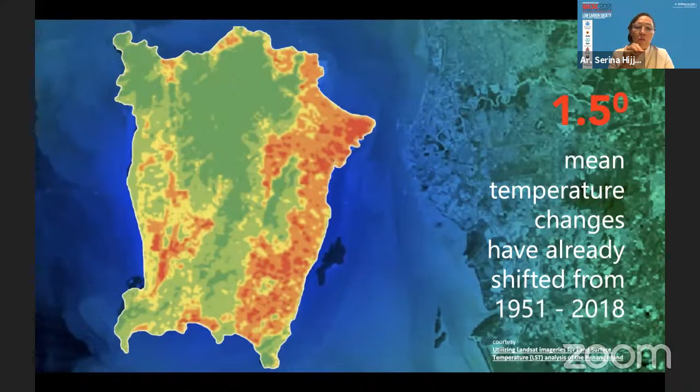From satellite images that we see here, for example in Penang, it's already reading these changes, and especially more acute probably in more urban densities than anywhere else. So densification really relates to temperature rise also, because we are increasing the amount of heat island around buildings.

We can actually map out the temperature difference of towers and buildings without greenery, without softening of green space, by at least 5 degrees. That's an incredible amount. In low-rise developments where there's a bit more greenery around, we might reach 24 degrees. But as we reach higher and taller, with harder surfaces and building materials that we are using, the temperature rise is significant. And that's just in terms of the micro temperature.

Densities are seen to be causing a growing reduction of urban greenery and ecology. Think City did a whole study rising from Kuala Lumpur to JB to Penang, and mapped the differences that have occurred in the last 15 years. And there's a direct correlation that as we get more dense, we also get warmer.

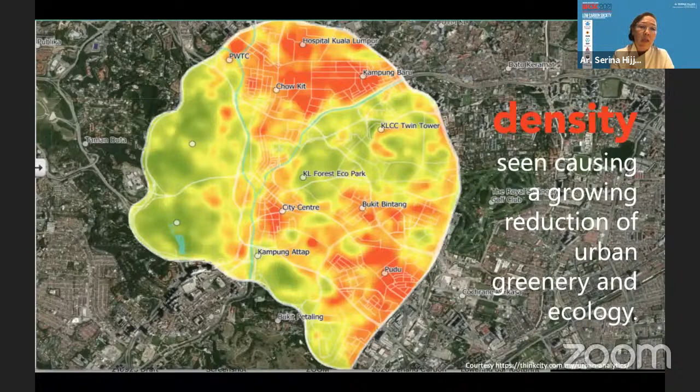So the impact of urban greenery really softens this heat island effect. It's no surprise, whilst Malaysia has an ecological footprint that is smaller than Singapore by half, Kuala Lumpur itself has only about 9.5% of green spaces in totality in the city. Which is low. When you go to Melbourne, or you go to London, and they are basically above 17%, about 20%, you immediately feel you're going into a garden city.

And maybe that's why we had the aspiration in Putrajaya that it would become a garden city for us. So how do we reverse this? How do we change this? I believe we have to really consider what I say is how we make.

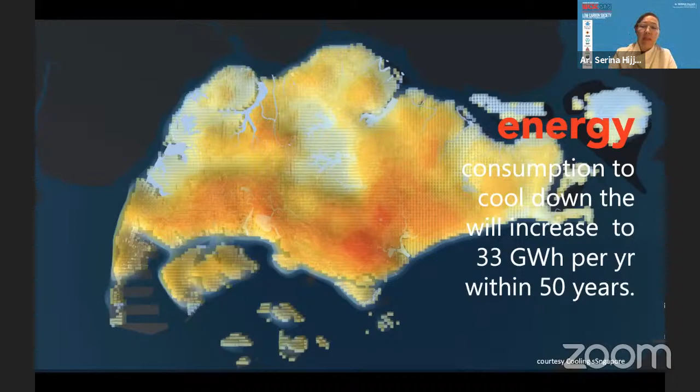So we're coming from the urban environment down to the buildings itself. And we are consuming more and more, and therefore we are also providing more emissions out. The consumption of materials, our emissions from embodied energy to operational energy, water and waste starts to increase. And for now, we start to talk about carbon, embodied energy, and operational energy.

When we started doing the pavilion for Malaysia at Expo, it was the first time that we discussed the idea of embodied energy and operational energy. And this is an interesting thing, and it's a little bit abstract for the person on the street, because how do they fathom what embodied energy is? We all know what operational energy is, and that's from our electricity bill, our water bill, the amount of waste that we send out. We can measure that, but we don't realize what embodied energy is.

So we need to rethink and change how we make. I think no one has really looked at or re-looked at the technology that we're applying right now. We've been on this trajectory of increasing and increasing, because it's based on a technology of efficiency which was developed in the war. So it's nothing short of what we are now considering to be a more nature-based technology design, because the technology we are implementing now was designed in war, and now we have to design for peace.

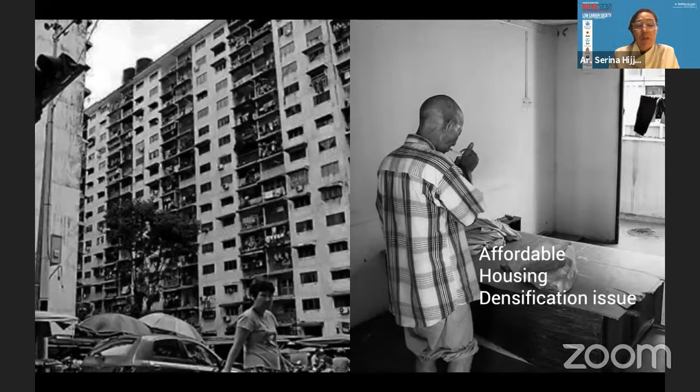Our urban housing typologies, as you can see around the middle ring roads of Kuala Lumpur, involve building these massive car parks below, some reaching 6 or 8 stories, with towers rising above that. There are also other typologies where, if we've got a bit more land, we separate and put the cars next to us. So our lack of public transportation and increased number of parking has really put a different slant on our housing - it's put cars before housing.

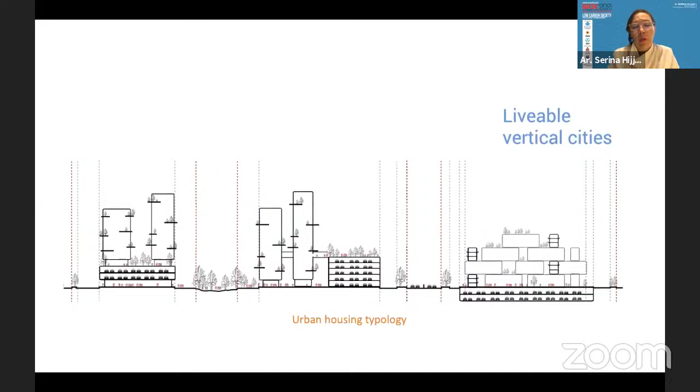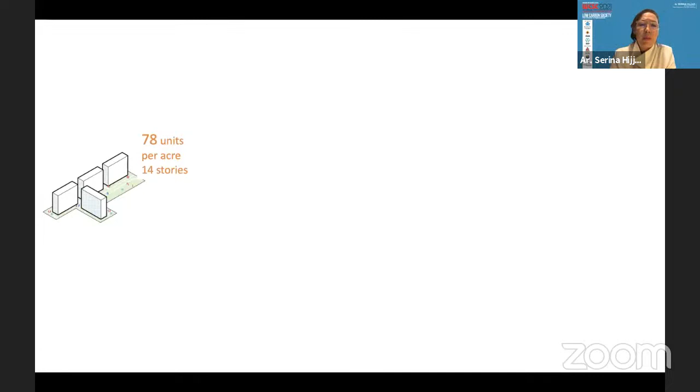So we did a study in Penang, and we saw that we started first at 78 units per acre, 14 stories high - still kind of livable, still almost close to the ground. Maybe at the time we thought those were really high rise, but that isn't really high rise now.

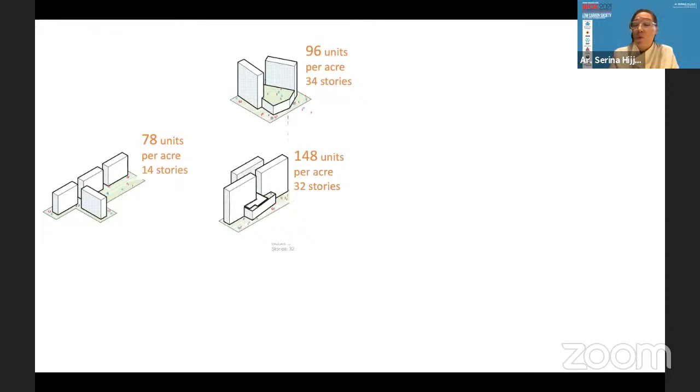We slowly increased that to 96 units per acre, 34 stories, then 148 units per acre becoming more dense at 32 stories. Then shifting up to 173 units at 43 stories, and even higher to 48 stories at 190 units per acre. And finally now, in Penang itself, we've arrived at 223 units per acre and 49 stories.

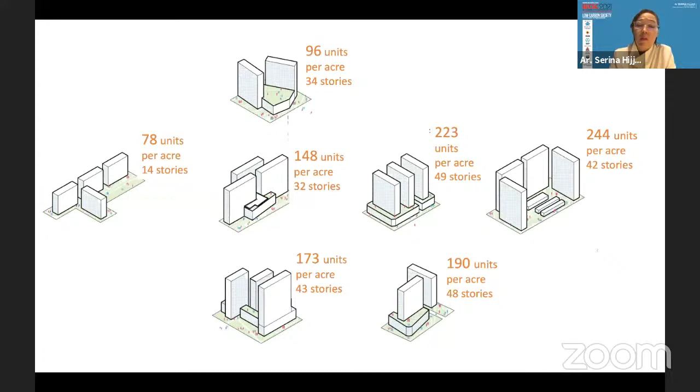This is incredibly high for the type of housing and affordable housing for people. Over 29 public schemes, 340 private developments, a total of more than 73,000 units, occupation for affordable housing for almost 400,000 people. I don't think that this is really a livable solution.

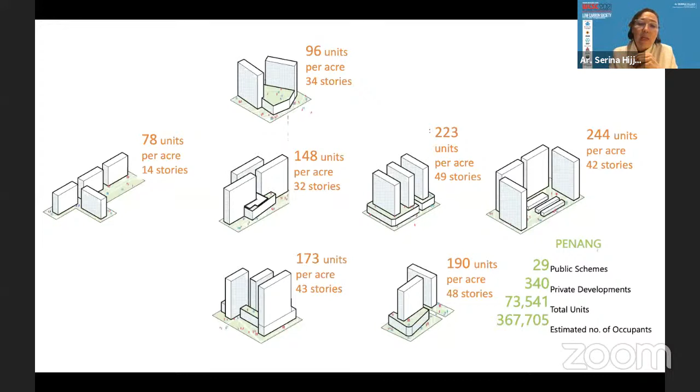So whilst we've seen also adoption of green buildings in some of these schemes, we haven't really seen what I would call real greening in terms of the development.

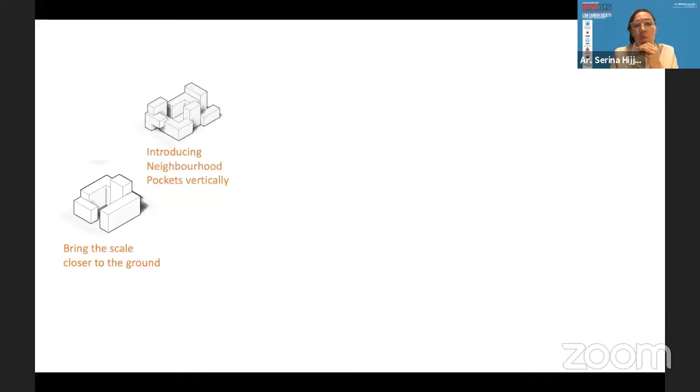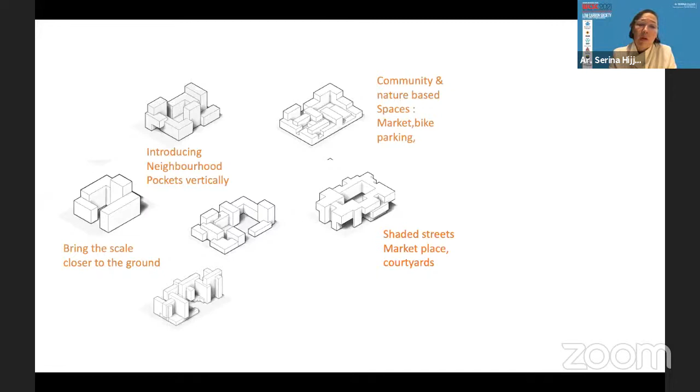So when we did a study, we thought it's really important that affordable housing is closer to the ground, that we introduce neighborhood pockets vertically, and that we look at community and nature-based spaces like markets integrated with bike parking, not car parking. For affordable housing, we should be encouraging public transportation, perhaps looking at biking, even electric parking for bikes instead of just bicycles. We should be considering these integrated with the type of housing — shaded streets, marketplaces, and creating a tropical responsive roof.

In this scheme, we were able to demonstrate that we could arrive at what we call a comfortable density at a comfortable height, providing housing with a greener plot ratio that allowed for future proofing in terms of where we're moving towards, and really look at how we're making our housing.

Integrating urban farming, which is important I think for affordable housing. Integrating some renewable energy, though we may never be able to provide fully. Rainwater harvesting, social neighborhoods and pockets.

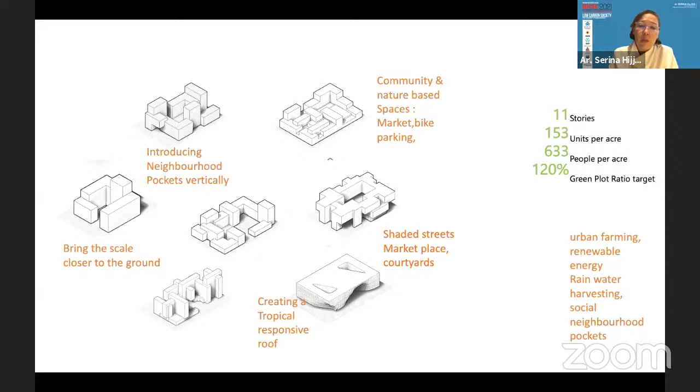Somebody once said that in high-rise residential affordable housing, the people can't afford air conditioning. I think there was a study that actually showed that the amount of air conditioning units stuck outside the building, and the amount of antennas for Astro, really showed that they did prioritize certain things over in terms of cooling their space.

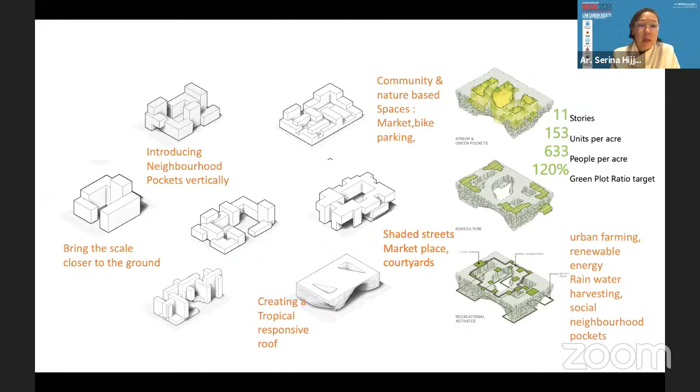So this showed an idea that we could actually move a little bit beyond just densification and integrate things that become more community and nature-based.

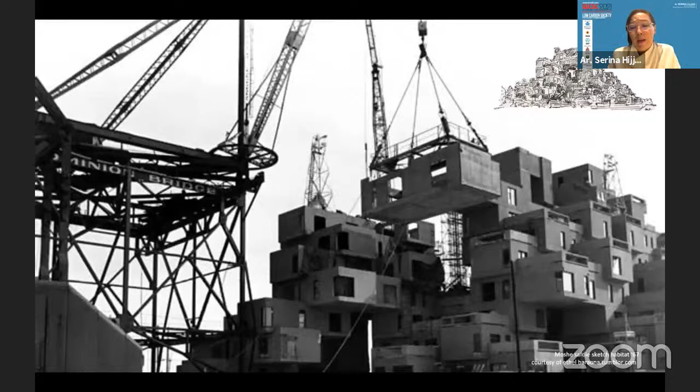So this scheme was probably motivated or inspired by Moshe Safdie's Habitat 67, a piece of seminal work that most architects know of. They like this idea of pixelation of buildings, different sizes of pockets, different places. It was one of the first to do IBS, but it was a failure when it completed. Now it's no longer a failure — it's actually seen as one of the best locations to live.

But one thing is that we have to adapt to a tropical environment. If we were to build a pyramid structure, we would get a lot more heat gain to all the units and the inhabitants living in there. So we decided, how could we make it tropical, responsive to our climate, people, and natural environment?

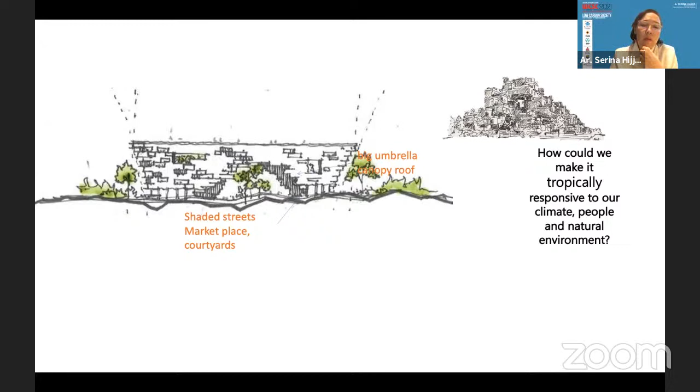We could turn it upside down and create a much bigger umbrella canopy roof, which allowed us to provide urban farming on top, solar panels on top for renewable energy, shaded streets underneath, and replace marketplaces with internal courtyards and places that would become more friendly. As you can see, the building is actually slanted 15 degrees in order for us not to get direct heat gain, but to respond in a passive manner to how housing could actually be.

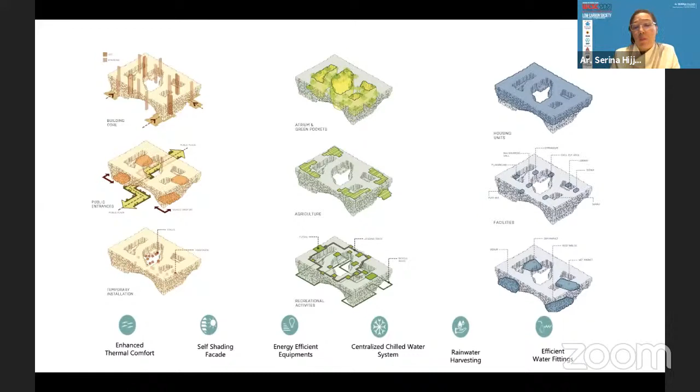This building considers at many different levels: enhanced thermal comfort, self-shading, energy efficiency, centralized chilled water systems, rainwater harvesting, efficient water fittings, and really turns our heads around in terms of how we make and build. There's no way we're going to change climate change, but we can change the way we make and live in our buildings. So this was the example of the building.

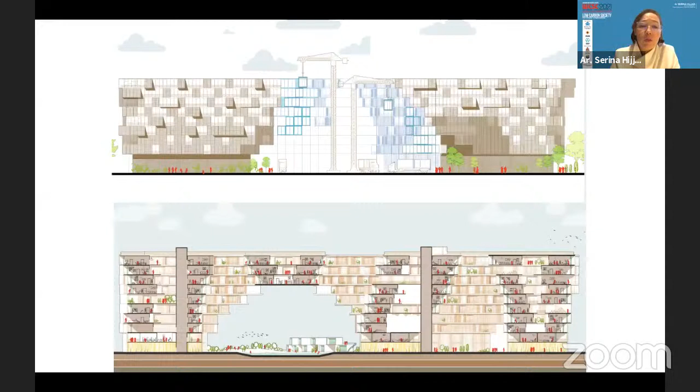It really just rises up to 11 or 12 stories. It gives us different pixelations of housing units. It considers the indoor and outdoor environmental spaces and provides a much more livable city and densification.

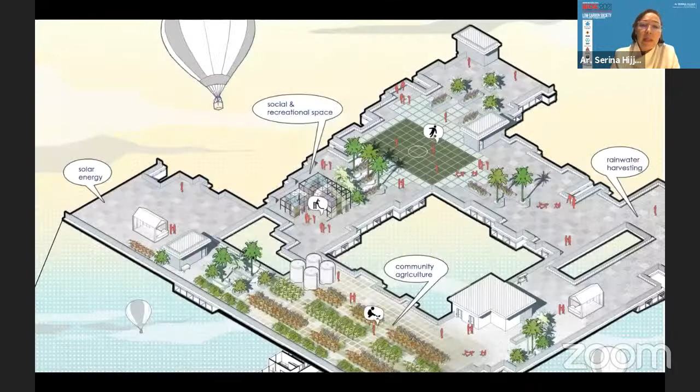So I just wanted to end this because I did the ecological footprint test. I don't know if many of you have done that, where you've entered WWF and did your own ecological footprint. Mine is at 4.1 — it means I need four Earths basically in the amount of consumption I'm doing. And that's because I'm not vegetarian, and eating meat basically consumes a lot in terms of carbon.

I travel by car three times a week to work and back in this pandemic. I'm going to take my first flight across to Dubai, and that's meant that my footprint is running at 4. Malaysia's footprint is running at 2.6 and 3.9 in terms of biocapacity and ecological footprint.

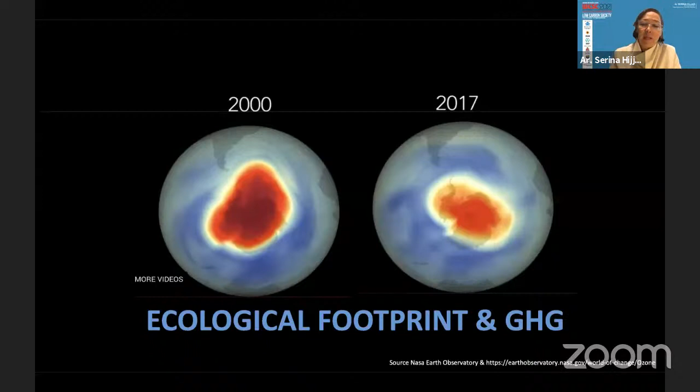I show this image because it tells you how much it will take to reverse what we are doing. This picture is essentially the amount of greenhouse gas effects, CFCs and fluorocarbons in our sky and the ozone layer. In 1987, we banned CFCs and fluorocarbons, and yet it will take more than 40, 50, 60 years for us to basically reduce that ozone layer and recover. And that's the amount of carbon that we have also emitted above.

So we really need to change drastically how we build. And I hope that everybody would probably reconsider, including developers. If we move forward in terms of how we do that now, we will find that it will be much easier for us, and just as beneficial economically as well as to the community. Thank you.

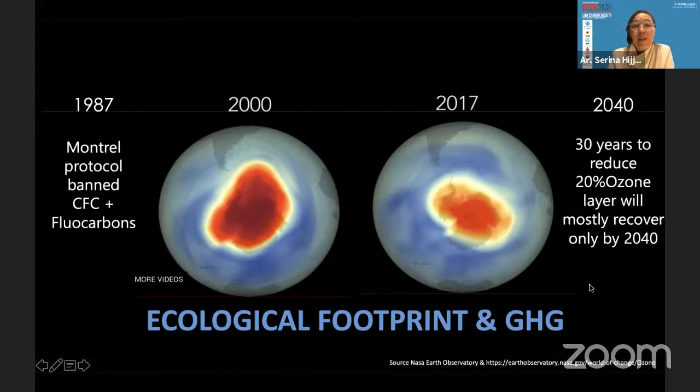Thank you very much, Architect Serina Hijjas, for the informative and interesting presentation. The next presentation, entitled Form Follows System, by Richard Hassell, co-founding director of WOHA.

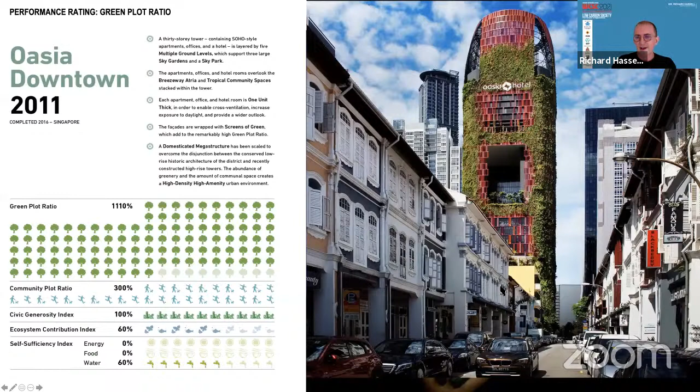Oasia Downtown is our star as far as green plot ratio. We managed to achieve 1,110% with this building, and the way we do that is we dedicate a lot of the surfaces to greenery, both horizontal surfaces and vertical surfaces.

You can see the entire facade - we really saw it as a host for greenery. It's actually a very affordable facade, it's just expanded powder-coated aluminium mesh, but we set it out from the facade and created space behind it for planter boxes.

At the same time, we put the cores of the building in the corners rather than in the center, and that allowed us to open up these very large volumes for social and green space in the middle of the building.

Next one is community plot ratio. So we're going to share with you Skyville, which is a public housing project in Singapore. Serena was mentioning the 48 stories it got to in Penang. This one is 47, almost the same, and has...

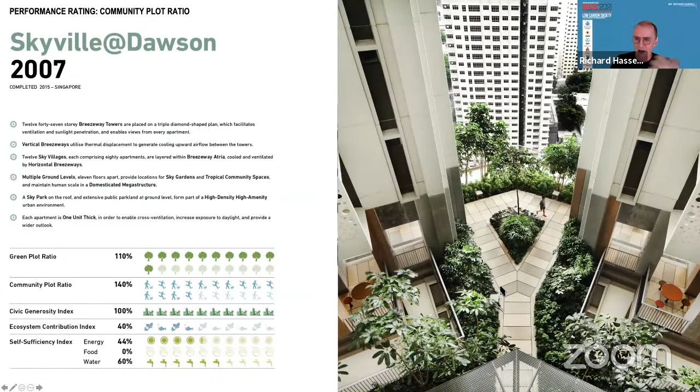How many units is it? 960 apartments in it. But the way we dealt with the idea of community and breaking down the scale and making it livable here was to think about sociability as the heart of the diagram. We did that by saying every home should be part of a village, and the village should be around 80 homes, so people get to know their neighbors and share a common space. In the end, we ended up with 12 villages of 80 homes rather than one building of 960 homes.

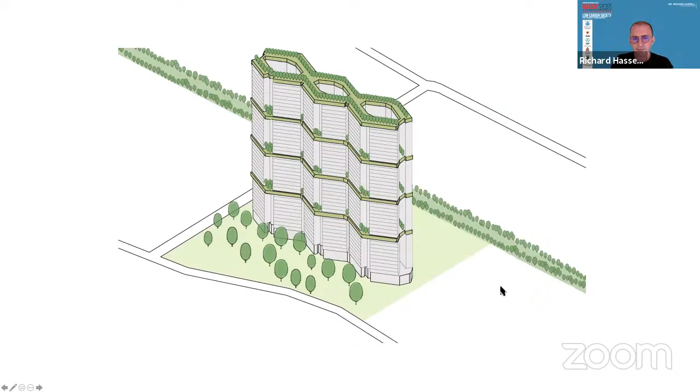And each village has a sky garden that it looks down into. Everybody, as they go from the lift to their apartment, will pass through this space and have an opportunity to engage with their neighbours.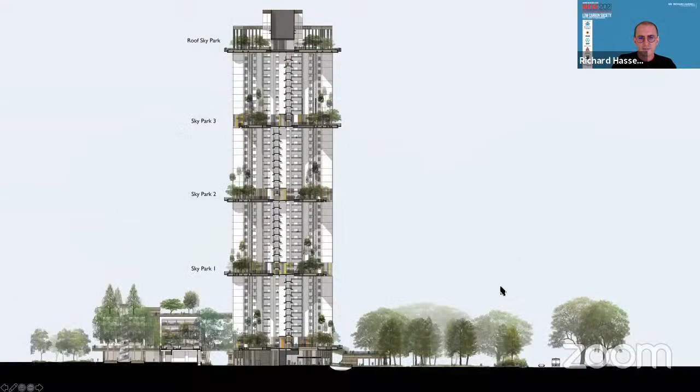At the same time, at the ground level, there are community spaces where other people in the neighbourhood can come and join in. So we built layers of different sociability, from neighbour to neighbour in a village, to the development and surrounding towers and neighbourhood at the ground level, and also at the roof.

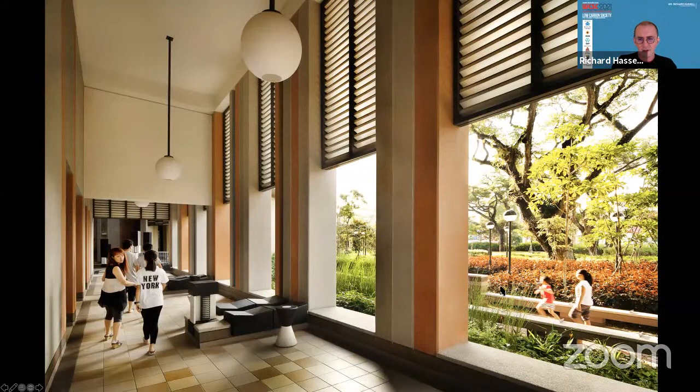All the moves were designed to enhance sociability. Whereas in a normal HDB in Singapore, this would just be a void deck, here we designed it as the community living room. We even set up the furniture to feel a little bit like lounge chairs, side tables and coffee tables, to encourage people to sit around and mingle.

Basically we just dropped 2 floors of units and created a double-story volume on one half of each building. So we basically lost 8 units, you could say. It would have been 11 floors times 8, and half of it lost a double floor, so that gets us to 80 units.

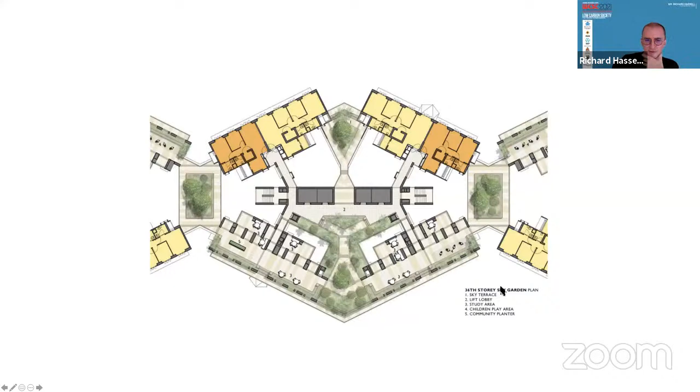Within this space, we could add some height for the planting, so we raised the level up, and you end up with about a 1.5 volume space for the social spaces.

This image is really the key to how it works. This is when you've just come out of the lift. Your apartment is connected on the left and the right by a sky walkway, and you look down into this area. So if your neighbour is down there walking their dog or doing some homework at one of the tables, you have an opportunity to make eye contact, to call out hello, or just to wave. It's a very simple idea, but it actually works very well and completely transforms the relationship you have to your neighbours in a high-rise building.

And then the rooftop is another fully public space, so anyone can come here and look at the view.

The next concept, civic generosity, is a way for buildings to be good citizens and to see themselves as contributing to a system. If you think of public space as a system that runs through the city, and every building contributes to the public space in a generous way, you'll have a really beautiful and generous city. If every building walls itself off from the city, or just takes from the city but doesn't give back to it, you end up with quite a hostile city.

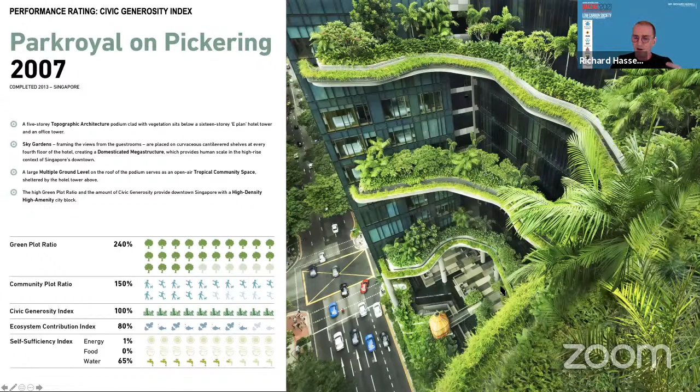The first aspect of generosity was that we thought it would be nice to match the generosity of Hong Lim Park, a park donated by a private citizen to Singapore in the late 1800s, and named after the benefactor. We thought the building could try to match his generosity by also creating the same amount of greenery in the building.

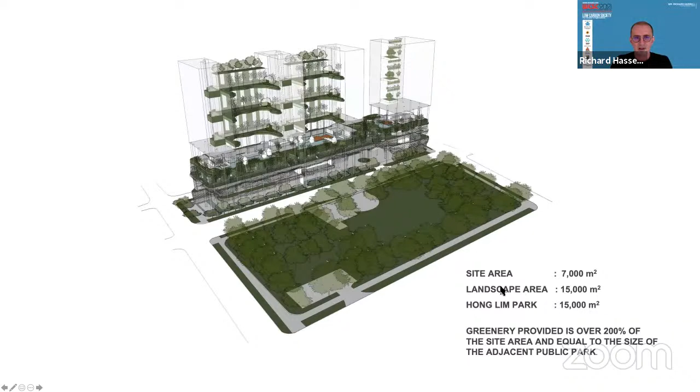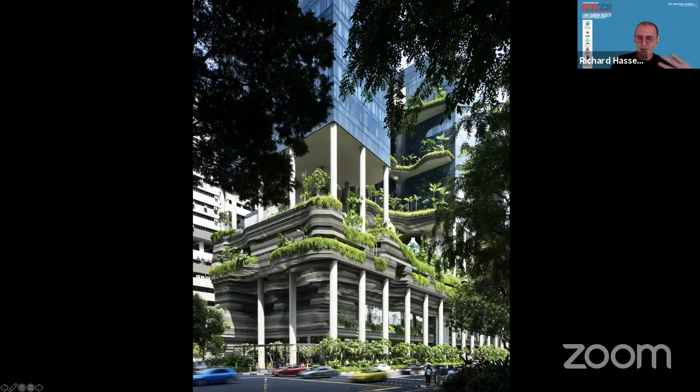We also thought it's really nice if, as you walk through the building, you in a way get the same experience as the hotel guests. So it's a building that says, we care a lot about the quality of space and environment, and we're sheltering you as you walk past, and come and enjoy the gardens and the water, even if you're just walking the city footpaths.

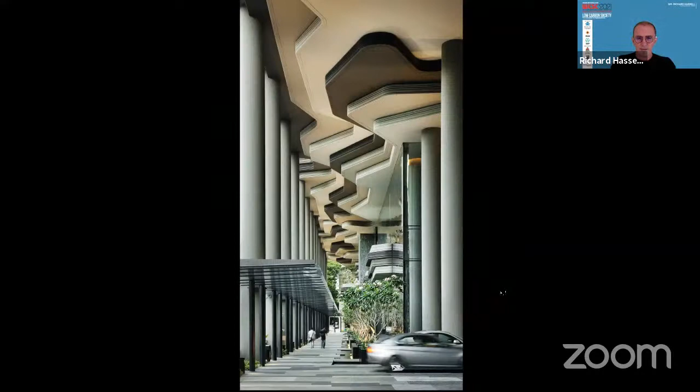Then it has very open and airy public spaces. It's volumetrically sharing wind and light and air that go right through the building to the neighbours behind.

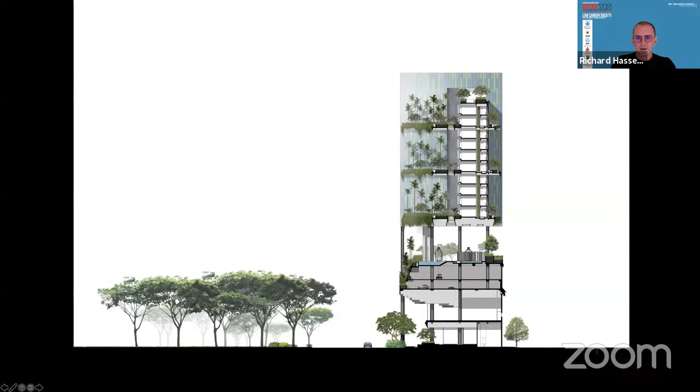And so even to the public housing blocks behind, it offers a sort of vertical park as a view for them. And this vertical park is also the circulation for the guests going to their rooms.

So the next rating system we think is important to measure is ecosystem contribution. This building we're showing, or more than one building, is a government project to house many different agencies which help people with different abilities. So here was really a chance to develop a very rich ecosystem as a garden. This development is not only friendly to all different kinds of human beings, but also friendly to all different kinds of plants and animals as well.

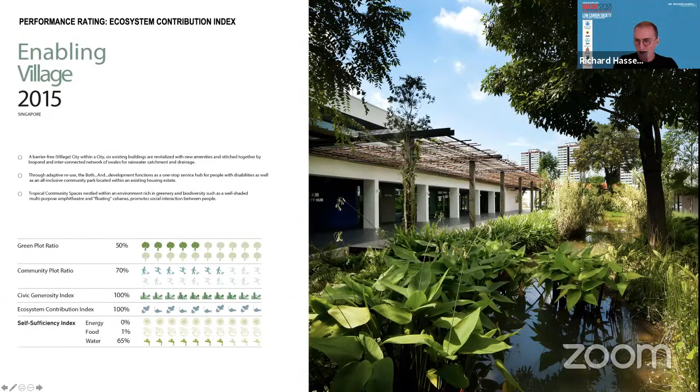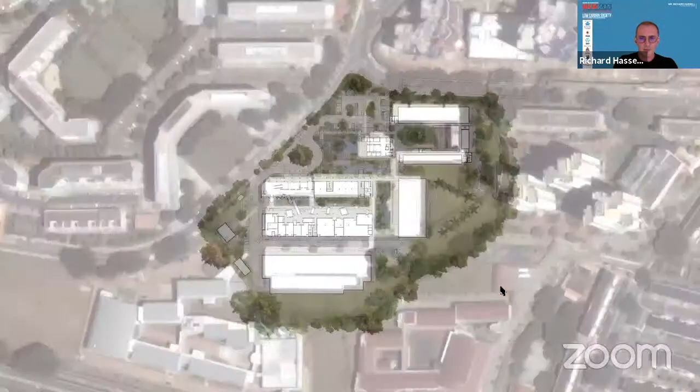So it started as a renovation project to an old technical college. It was mainly car parks and paving and some buildings from the 1960s to the 1980s, so quite a plain building. We worked with our landscape consultants on this to consciously make it into a very vibrant and diverse ecosystem. It was also done in a way that it was not only serving the needs of the client, but also serving the needs of the surrounding neighborhood to have a neighborhood park.

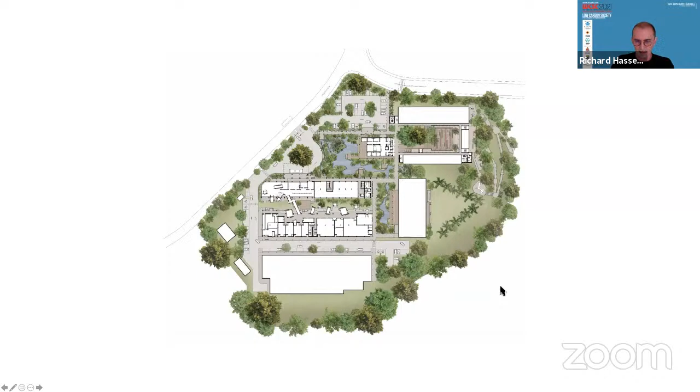So anyone can wander in here, which also performs a kind of soft communication of the ideas behind it, which is that people with different abilities can still function very well in society if design makes a friendly environment for them.

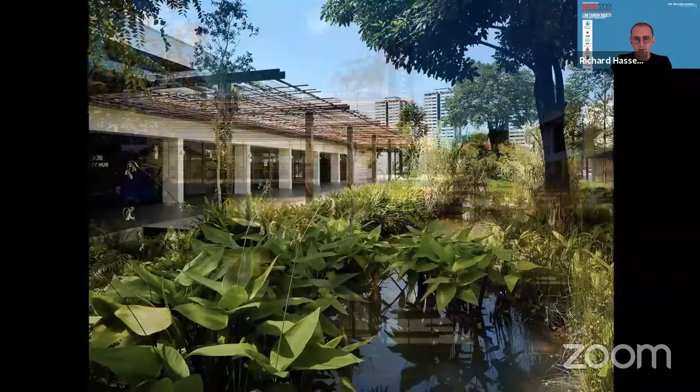And so it's interesting when you design for biodiversity. There's a lot of plants that attract birds and insects and fruit for other animals, so it's very fast for all the animals to come in. Some surveys we've done have shown that it really has a lot of biodiversity, and it's increasing all the time. So sometimes just adding the objective that you want to design for biodiversity can have a very big outcome for really no difference in the budget.

So the last one, the self-sufficient city, was a project we did to study: can we do an area that's fully self-sufficient in food, energy and water? If you remember Serena's footprint diagram, this would shrink the footprint of the district to its own area. This is something we've started to run as a masterclass at NUS School of the Built Environment for 8 years now. We've been doing it on Singapore as a whole and seeing whether it's possible, which we're finding it is doable.

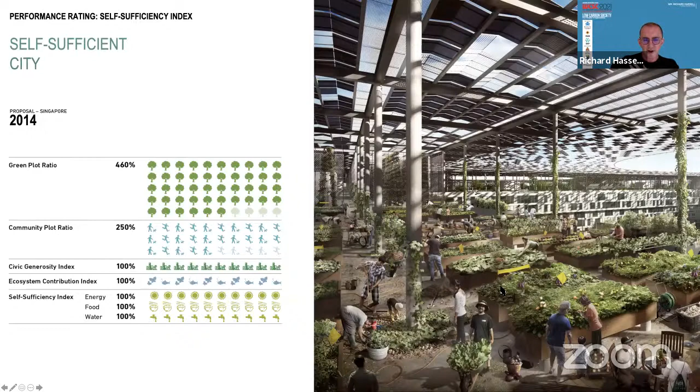But again, it's that systems thinking. It's thinking, if it is going to be achievable, what does every piece of the city have to do in order to contribute to the overall systems? So the energy harvesting layer, for instance, as Serena mentioned, has to be bigger than the footprint of the building if you're over about 4 or 5 stories. In this case, we extended the energy harvesting beyond the edge of the building to almost double the footprint area to harvest energy.

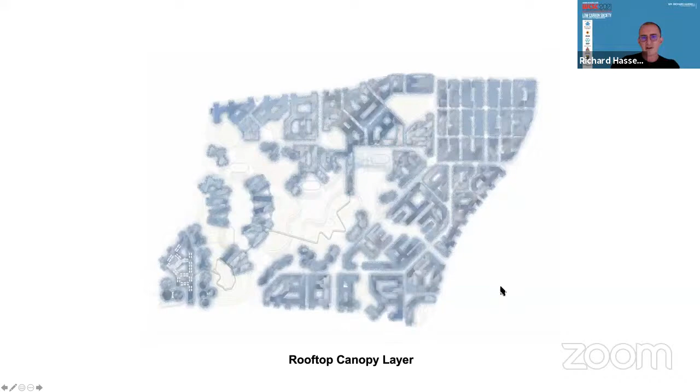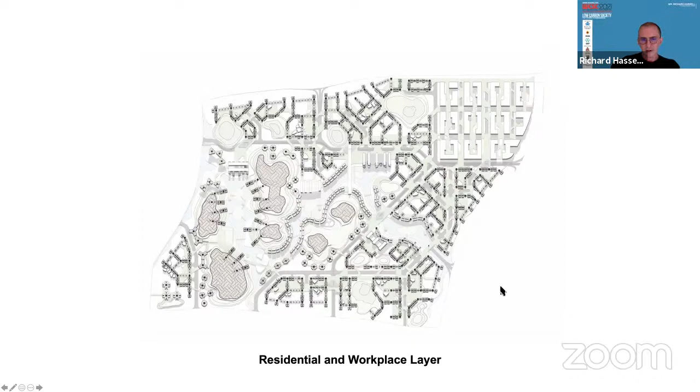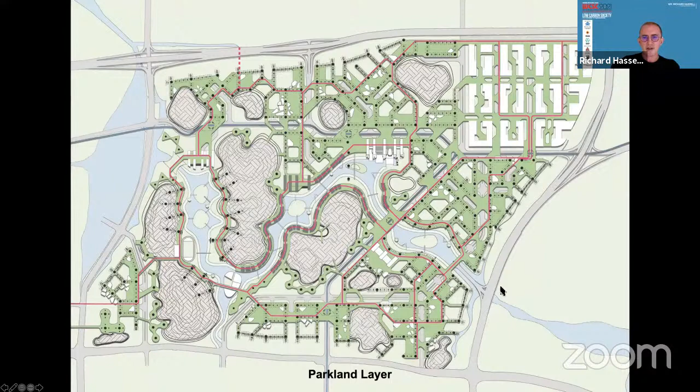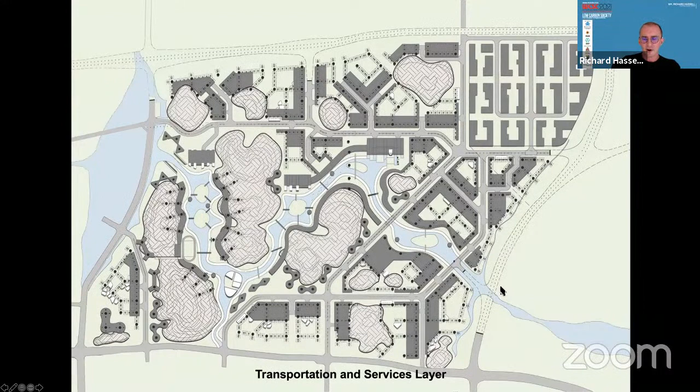We then had a residential workplace layer, and the whole thing is designed as a walking city, so there's no need to have a car or use private transportation. We then have a rainforest that runs right through the city, so we have a very productive ground floor in terms of ecological and environmental services performed by the ecology. Beneath that, a transportation and service layer, but really mainly relying on autonomous vehicles and logistics delivery and things like that. So it's not really used by human beings down at that level.

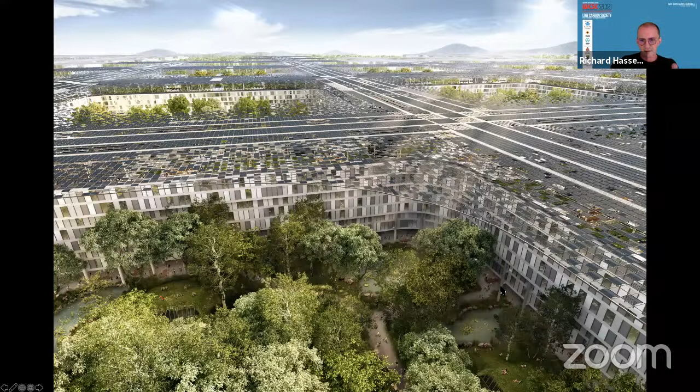And so it was done first as a competition in Singapore. We then did it for a district in Jakarta, but the principles would generally apply in Malaysia as well. So it is possible to be self-sufficient at around about this scale by designing differently from the point of view of designing for low carbon.

For instance, the entire rooftop of the city is one connected agricultural layer for growing vegetables. What we're showing here in the foreground is like a community garden, which is a social space, but in the background is using high-tech vegetable growing, which makes much more efficient use of the space.

The idea was that it may not be a very interesting skyline to have this sort of agricultural skyline, but we thought it was interesting to flip a typical skyline upside down and make a really interesting ground plane at the human level where you're experiencing the city, so it can have all kinds of volumes and interesting spaces as you walk around.

So the ground plane is only electric ground-level trams, bicycles and personal mobility devices. It's very shaded and green and connected. There are no cars at all at the ground.

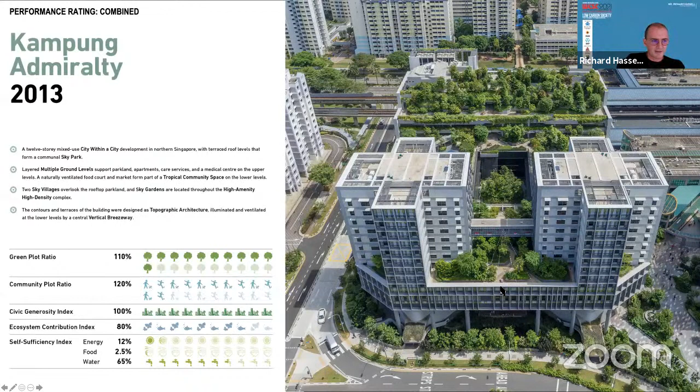Next one is Kampung Admiralty, a building that we designed as we were developing these ratios. I think it performs very nicely across all of them in terms of green plot ratio, community, civic ecosystem, and self-sufficiency. It basically took a whole range of uses from medical center to elderly housing and community and rearranged them to create a major public space at ground level and a major park on the roof. The social housing sits within the park.

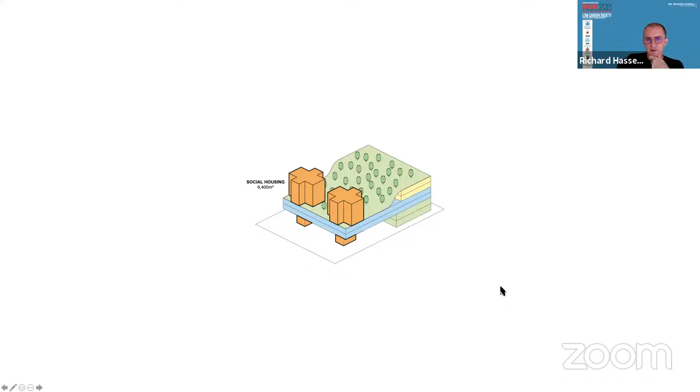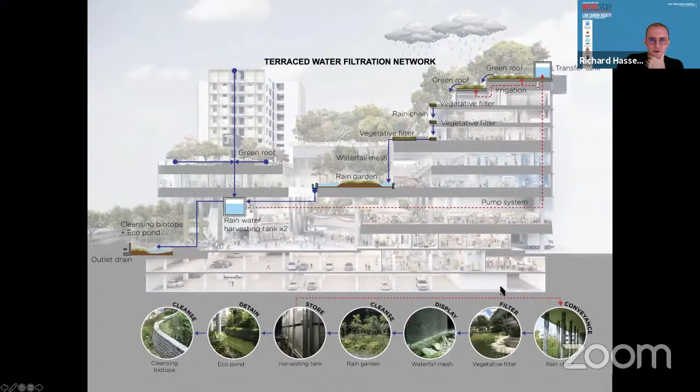It has a whole water system that runs through it. So we use the different layers of the garden to filter the rainwater and recirculate it.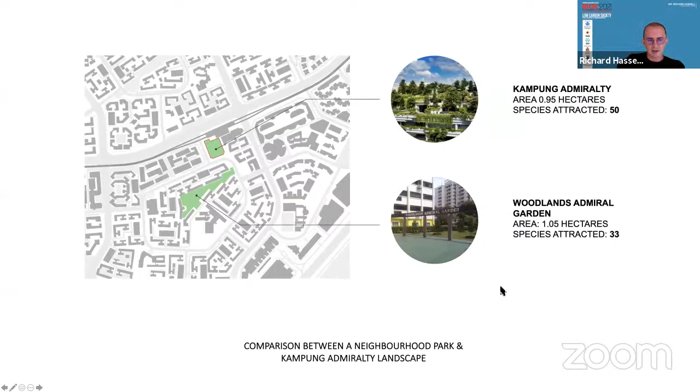And we've done post-occupancy biological surveys. We actually have almost twice as many species in our rooftop garden as there is in a park on the ground level. And these are some of the creatures that we photographed within the gardens.

So yeah, it's not an expensive project. It's an HDB budget — it's just painted concrete, precast and prefabricated.

The medical center in the middle is to attract the elderly to use these services and practice preventative medicine rather than waiting till they're sick to get treatment.

And the public space at the ground level — the childcare is next to elderly care, so you have a mix of old people and young people together, and a big communal garden on the roof.

So the final one I just wanted to share quickly — I think often as architects we feel a bit powerless to influence the outcome of government policy or private developers. But this is a really nice project we finished recently in Taichung in Taiwan, which was a great example of people coming together to make change.

So we actually came through the university — I think it's something where academics can also be very powerful. The university organized for us to make an exhibition of our projects in Taichung because they specifically wanted to influence government planning policy. So they helped us put up this big exhibition in an old aircraft hangar.

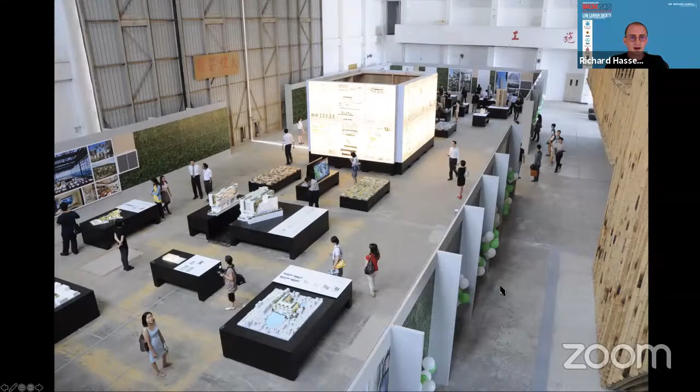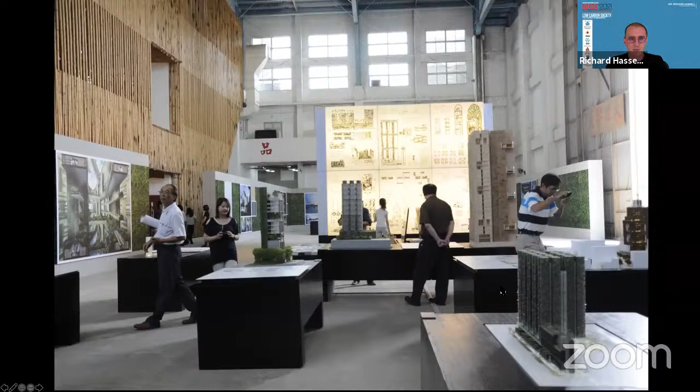In the park in the middle of the city, they organized a whole series of presentations and talks, inviting the city planners in, to really point out that many aspects of these projects were not possible under the current planning guidelines in Taichung. So they started to lobby to change the regulations to enable more green buildings to be built.

They then paired us up with a developer, Golden Jade, and asked the developer to do a demonstration project, which they thought would be good for business as well as good for the environment. So this is our...

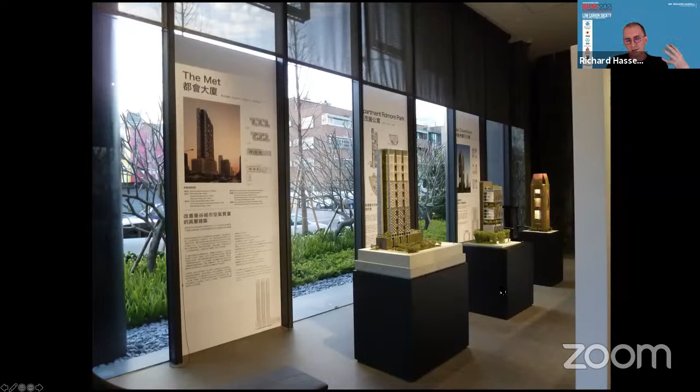They then launched the project and continued the exhibition and advocacy work in the sales unit. They basically used this idea of transformation as a sales tool and as demonstrating the thought leadership of the developer, continuing to hold press conferences and workshops.

And then finally, they finished the project. During the time of the project, they worked with the city to change the regulations. And so now, under the Change City plan, there are over 50 buildings underway which involve greenery.

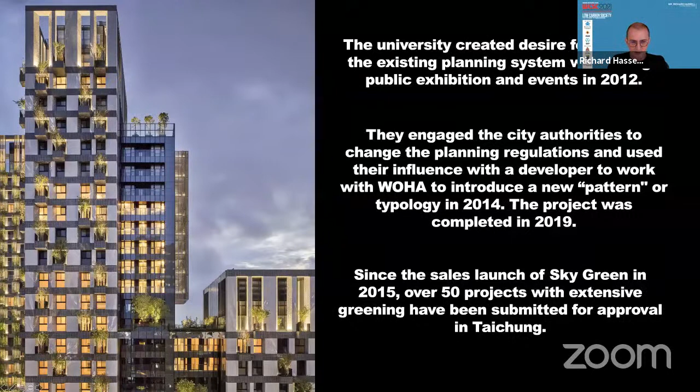So it was a really good example of how, in a fairly short time, by people coming together wanting to affect change, it was possible. And the city of Taichung is now one of the leading cities in Taiwan for greener architecture.

That's the end of my presentation. Thank you.

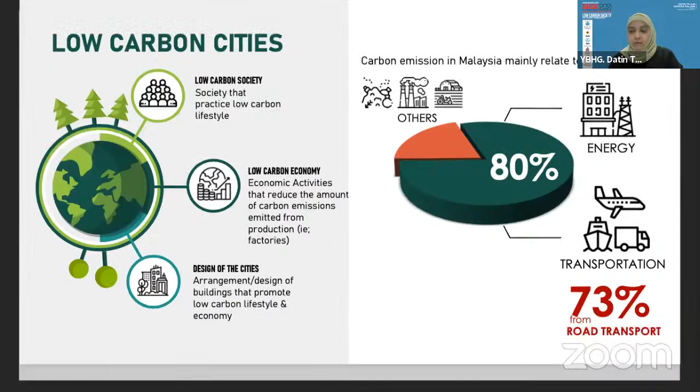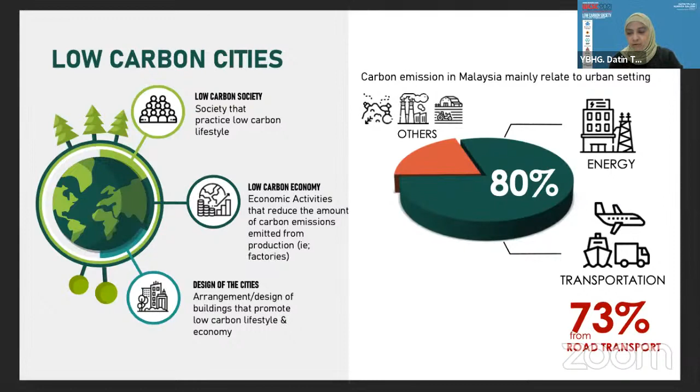Today, this morning, we also spoke about urban environment and greenery, where Dr. Aisa Tobing and Mr. Andy Ball presented examples and key success factors, the critical elements that contribute towards urban environment and urban greenery. There are six largest GHG emitting factors we've learned about: transport, energy from electricity, waste, industry, land use change, and agriculture.

If we look at the context of where we are today, especially on transport, energy usage, waste generation, and land use change - these are things that everybody in this conference, urban planners, town planners, architects, landscape architects, developers, we all have a role to play and need to shift our practice so we can help cities in Malaysia, Kuala Lumpur especially, achieve the aspiration of moving towards low carbon cities.

If you look at transport specifically, we're talking about shifting mode of transport and looking at first mile and last mile solutions, making it really easy for people to shift their lifestyle. How do we encourage that? There have been a lot of lessons learned from yesterday's papers.

I hope in high-rise buildings that we could change and not see parking stacked above each other, but perhaps a different view can be seen in terms of parking as basement. So there is a lot of shift that needs to be done, not just in how we influence the urban setting, but also in how we develop things.

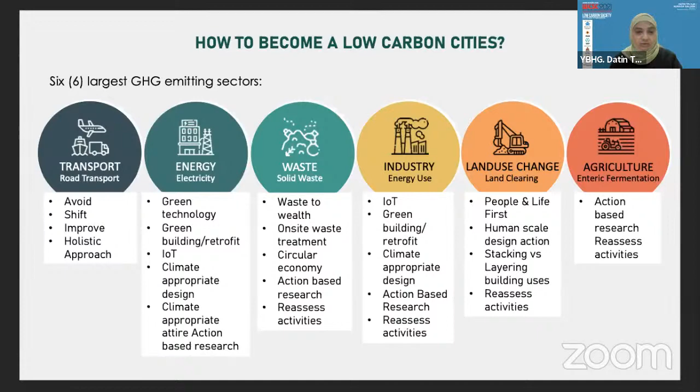We talk about circular economy. Dr. Aisa Tobing spoke about circular economy, and in fact, from all the speakers, we learned that what's really important is research, data, and evidence.

Moving forward, I think what can be learned from the 2 days at WCSC is that sustainability, and in fact low carbon, is not an option anymore. It is everyone's responsibility.

And to achieve that, we need to have blueprints and action plans, which a lot of cities in KL, in Malaysia for example, have already come out with. However, these blueprints and action plans need to be done holistically.

They also need to be flexible or dynamic enough so that we can make room for inevitable or unimaginable circumstances, such as the pandemic that we are in today.

The actions we are going to implement need to be based on concrete data and implementation. This needs research, a lot of study and data collection, so that decisions are made on evidence. And if we need to change midway, there's always that data used to back those changes.